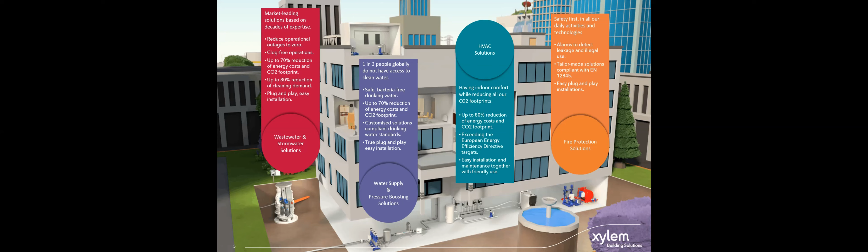And when we look on our overall building solutions from Xylem, from the top view, we are serving all the water cycles in a building. So we are having solutions for the water supply and pressure boosting when the water comes in. We are talking here about pumping solutions, metering, energy optimization. We will see this in some detail later on, because also the Reservoir Plus is part of these solutions in this application segment in a building. Then we have HVAC solutions. We have wastewater and stormwater solutions, and we have fire protection solutions. So we have really a very wide portfolio to help to make green buildings more green and more efficient.

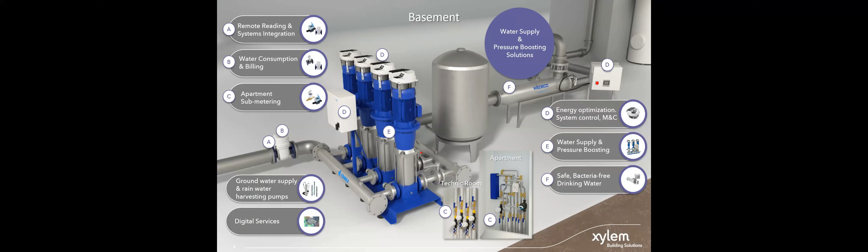So talking about water supply, this is a general overview here with the applications that we serve. So from the metering, when the water comes inside of a building, to a possible booster set in a commercial building with Hydrovar on the top, which is a frequency drive which can be mounted on any installed pump, electro pump, on a standard motor for energy optimization. We have UV treatment to ensure safe drinking water inside of the building, also combined with monitoring and control applications.

We do sub-metering in the apartment. We have digital devices and services to connect the systems to cloud-based services to monitor our systems 24 hours, 7 days a week, to ensure that everything is okay. And next to the surface solutions that you see here, we have also a wide range of groundwater supply and rainwater solutions.

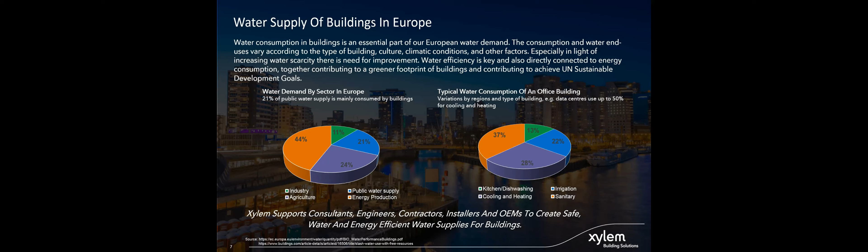And now we will jump into the application of water supply and pressure boosting. This is very specifically where we will find our new reservoir, and Liam will tell us now more about this new solution for water supply and pressure boosting inside of buildings.

And of course, we also need to integrate our house systems, like solar panels, air conditioning units, and water tanks, or rainwater harvesting, to simply make buildings more sustainable. And our purpose is simply to guarantee stable water pressure at any time of the demand that is needed, to ensure the lowest energy consumption, and to make it simple for our customers to install it, and to have an easy life when it is installed.

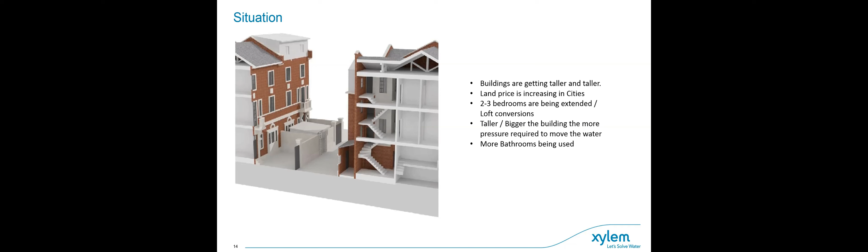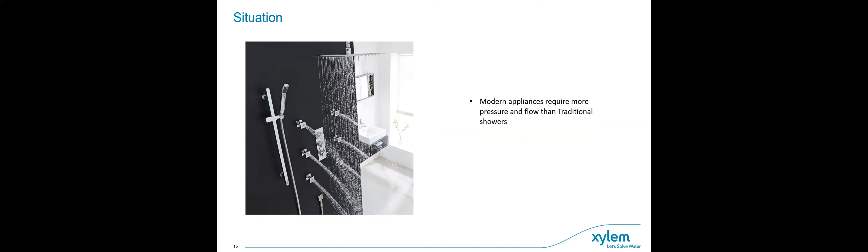And also with the extensions and pipework going into the loft, there's a natural demand for more pressure to overcome those losses in the pipework. At the same time, more modern, more luxury appliances require greater pressures and greater flow rates than what we would have seen 10, 15, 20 years ago. So there's generally a greater demand for more flow and more pressure in modern day houses.

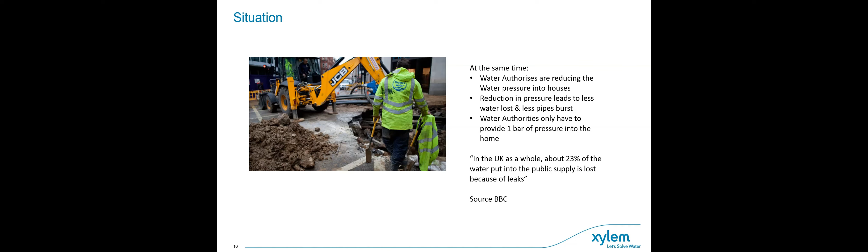Now, water authorities only have to provide 1 bar into a domestic dwelling. So as you can see, there's a bit of difference between houses requiring more flow and pressure, and at the same time, water authorities reducing the pressure going into buildings to overcome some of the losses in the system.

And then the UK is a little unique from mainland Europe, in that every time you want to boost the pressure on the main system exceeding a flow rate of 12 litres a minute, you have to have an air gap between the water level and the inlet of the mains. This is to prevent contamination into the mains. So in the UK, legislation has stated over the past 10, 15 years that before you can boost the water pressure into your house, it has to go into a break tank, with an air gap between the water level and the inlet of the mains.

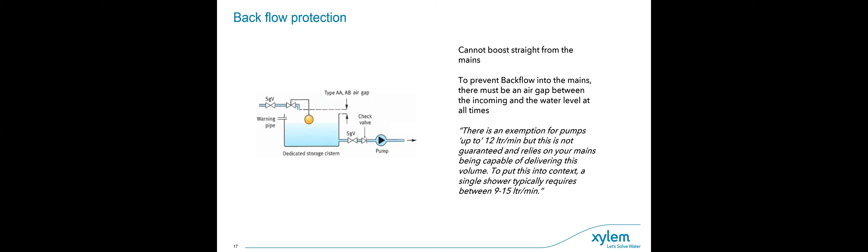So we've got 3 kind of issues then at play. We've got the water authorities reducing pressure going into domestic dwellings. You've got a general requirement for more pressure and more flow due to design of buildings and requirements of modern day applications. And you've also got a requirement from the water authorities to have an air gap between the level of the water and the main supply.

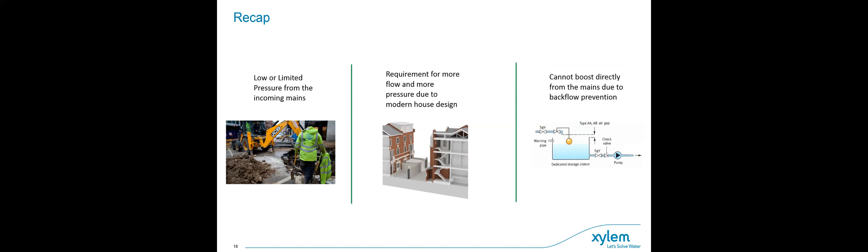So based on these problems, there is a requirement for a compact break tank booster set to boost the water for domestic and light commercial applications, which is the reason why we have launched, or will be launching at the end of the month, the Resvari Plus, the compact break tank booster set.

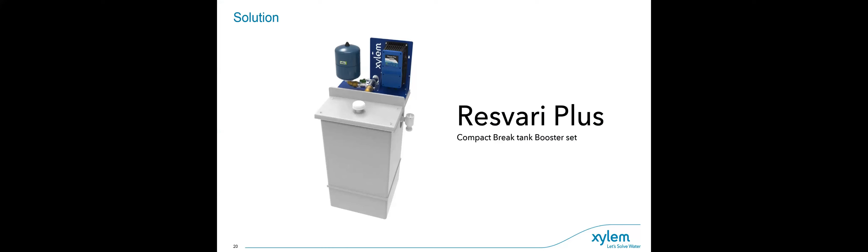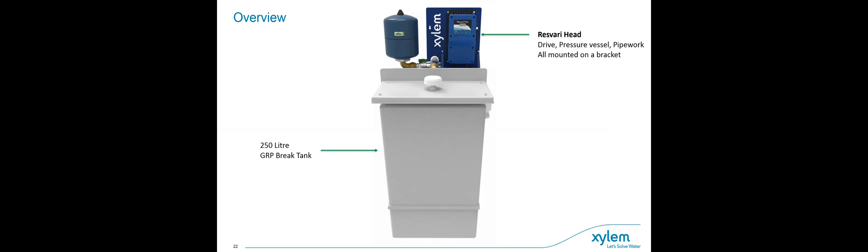So in this section, we're going to be talking about the design of the product. It generally comes in 2 parts, or we're referring to it in 2 parts. You've got the head, which is the drive, the pressure vessel, pipework, and that's all mounted on a mild steel bracket. And then you've got the GRP tank that the head sits on. And inside the tank, you're looking at a stainless steel submersible pump, and you've got your traditional float valve and float switch to protect the pump.

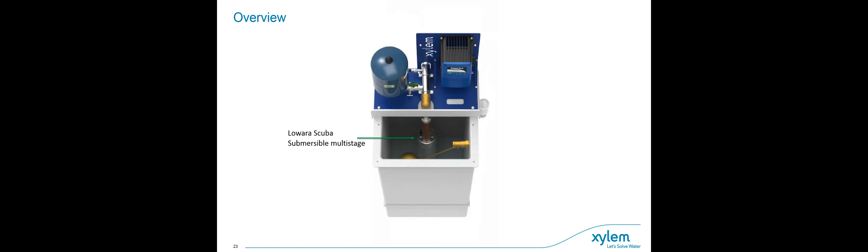And as you can see here, this is the view of the unit from inside. So if you were to remove the lid of the unit, you can see the scuba pump sitting right in the middle there. Then your ball cock to the right. And we've designed the unit, especially in terms of footprint, to sit quite nicely in a domestic installation. So it doesn't look out of place in your garage or an outhouse or a utility room.

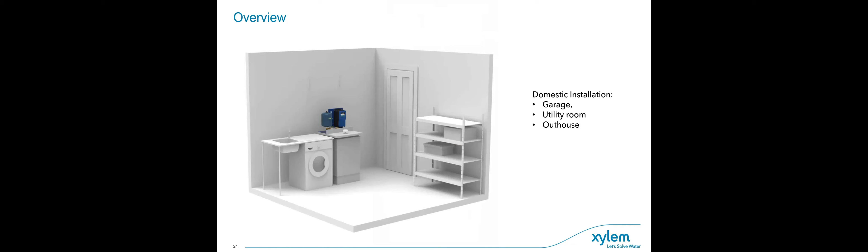And in terms of the footprint of the unit, it doesn't differ too much from a traditional washing machine or a tumble dryer. So you're looking at a washing machine or tumble dryer having a width of about 600 by 600 deep. And we follow that as well. So our unit is around about 600 deep and 700 wide. And this allows it to be maneuvered through a traditional domestic single doorway, the single doorway being round about 750 wide by 2 meters tall. So you're able to maneuver the Resvari Plus through a domestic doorway without any changes.

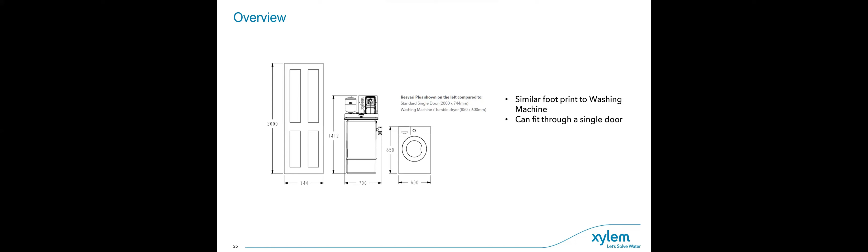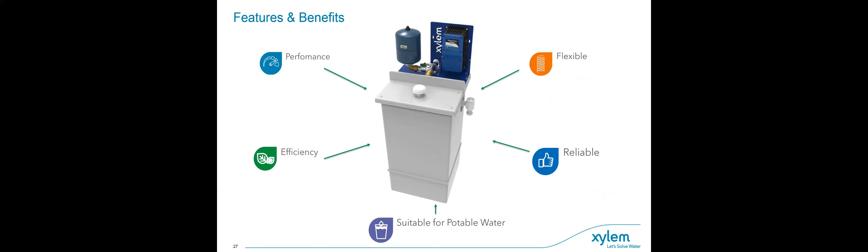So now we're going to be talking about the features and benefits of this new product. These are the topics in terms of the performance, the efficiency, the suitability for potable water, the flexibility of the product, and the reliability of the components. So in terms of performance, we're using 8 variants of scuba pump inside the Resvari Plus, and the flow rates range from around about 1 cube an hour all the way up to 7.

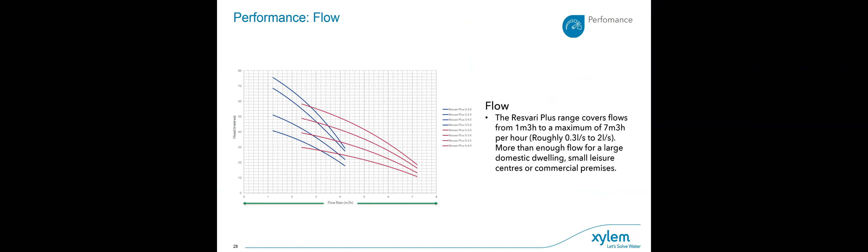And in terms of the pressure, we can see that one of the smallest scuba units, the 3-3, will do around about 2.5 bar at 3 cubes an hour, all the way up to the most powerful unit, which does round about 7.5 bar pressure, closed valve.

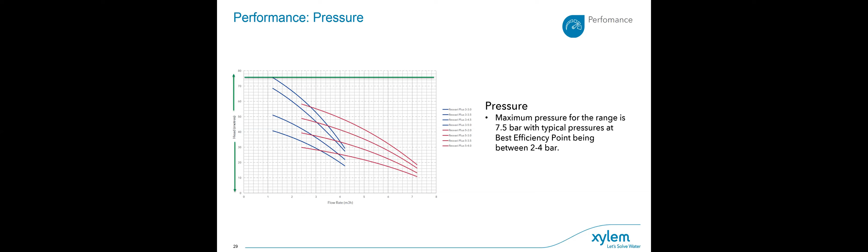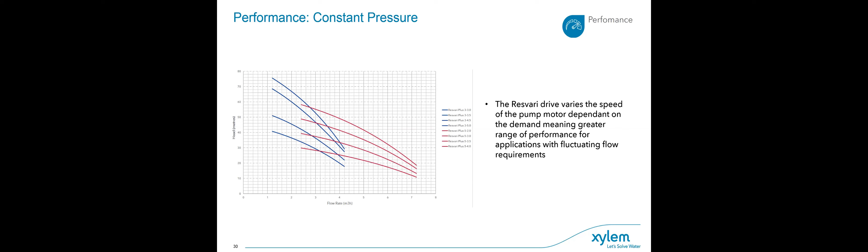And in terms of the performance as well, because the unit is built with a variable speed drive, you can set the variable speed drive to deliver a constant pressure. So in a traditional domestic application, depending on how many outlets you have open, depending on the flow rate, the pump will ramp up and slow down to maintain a constant pressure within that dwelling.

Next, we're going to move over to the efficiency of the product, and we're going to be talking about the variable speed drive. So this is the drive that we fit onto every Resvari Plus. And the general rule of thumb is variable speed drives can cut energy consumption up to 70%, and that's compared to a traditional fixed speed unit. Now, that is a general rule of thumb, and that's a rule that we've used in terms of talking about variable speed drives. So your mileage may vary depending on the application. So you can cut the energy consumption up to 70% versus a fixed speed unit.

And as I mentioned earlier, the drive modulates the speed of the pump depending on the flow requirement. So you've got one tap open, the pump will run slowly, all the way up to if the shower was on, if a bath was running, the pump will run flat out.

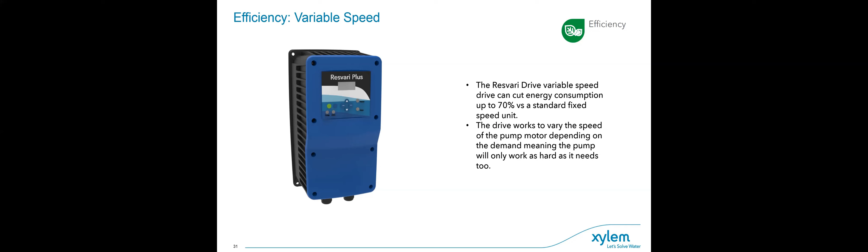The drive itself, it's very similar to what we purchased out of Italy, which is the Resi Boost. However, it's been slightly modified for the UK market. And it's perfect. It's absolutely perfect for domestic light commercial use. So it perhaps doesn't have the features you would find on an SMB set or a GHV set. It doesn't have BMS control, but for this type of application, it's absolutely perfect at maintaining a constant pressure.

We've also modified the parameters very slightly, so to prevent a user, a house owner, from accidentally changing some of the settings and rendering the unit useless. So we've hidden a lot of the important settings behind a commission menu. So that's just for a service engineer to modify on site. And like I said, this will prevent errors from happening and stopping the water supply.

And also with this unit here, we've allowed for two drives to speak to each other. And compared to an SMB or a GHV booster set, they act in the same way. So if one of the drives was to fail or one of the pumps was to fail, the second unit will take over and become the master unit.

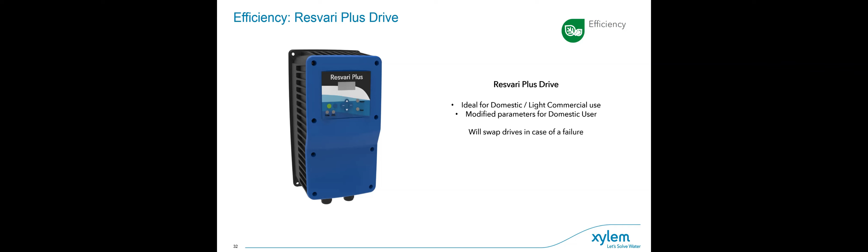In terms of efficiency as well, we'll talk about the scuba unit. So we are using the latest generation of scuba pump. It was already an efficient unit, but we've made improvements to improve the efficiency. And the latest generation is now one of, if not the most efficient 5-inch submersible multi-stage pump on the marketplace. And it's also fitted with an IE3 rated motor as well.

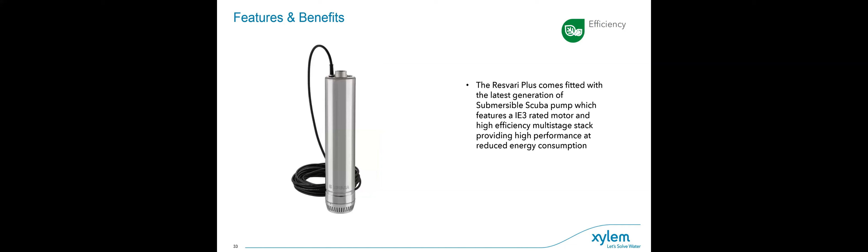Moving over to the flexibility of the product. As you can see on a slide I've shown you previously, it fits quite nicely into a utility room. So it's not too obstructive. It doesn't take up too much room at a domestic dwelling, but it's also perfect for crowded plant rooms and storeroom cupboards. So if you're looking at an application which is really limited on space, then you could look to use a Resvari Plus to provide that cold water boosting pressure.

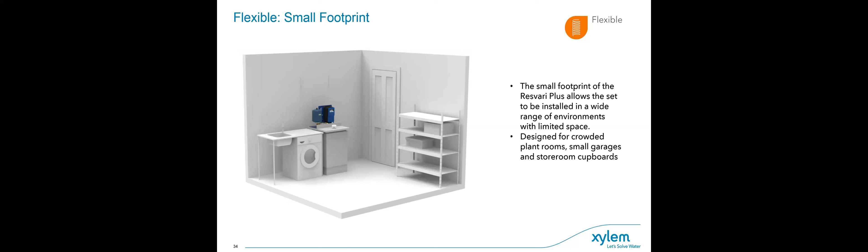Another thing that we've looked to integrate in terms of flexibility of the product is the back bracket can be removed. So in terms of the head of the unit, you've got two side brackets which hold the back bracket in place. So if there was ever a time where you wanted to install the Resvari Plus unit maybe outside, and you wanted to protect the drive from weather, you can detach the back bracket and fit it to a wall, an internal wall, or somewhere you can access a little bit more easily than when it's mounted to the top of the unit.

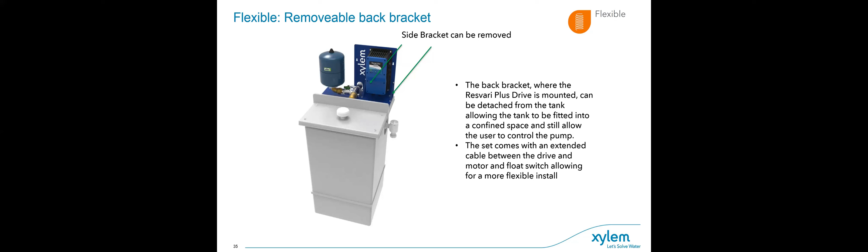It also gives the user a little bit of flexibility, so they can remove the back bracket, put all the pipework in place behind the unit, and then reattach it. So if there's ever a leak on some of the pipework or a leaky valve, for example, the installer can remove the back bracket, access the pipework, and then replace it.

And what we're supplying along with the Resvari Plus unit is an assist tank. So we started supplying these units on the original Resvari that was released 10 years ago, and we're looking to carry over that idea. So if you wanted to extend the stored water capacity to 500 litres, you'd be able to purchase another 250 litre tank, and then you could couple the two together using just a bit of pipework. We recommend a 1.25 inch or an inch and a half connection at the bottom of the tank.

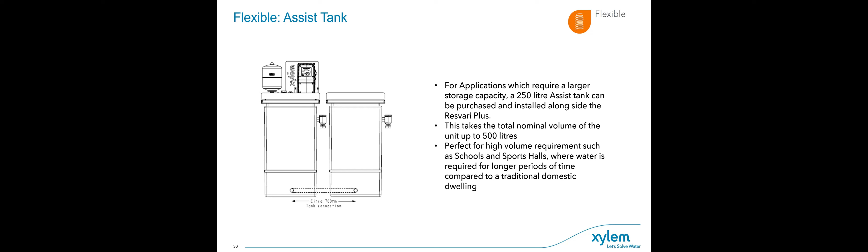Talking about one of the main aspects of the design of the product, we've designed it so that the Resvari head, the item with the bracket, the drive, the pipework, is actually one single part number. So regardless of the pump that you choose to use in your Resvari Plus, there's only one part number that we use down in Axminster. Now this gives us the benefit as we can stock the head in Axminster, and that can significantly reduce the amount of time it takes to build up a unit.

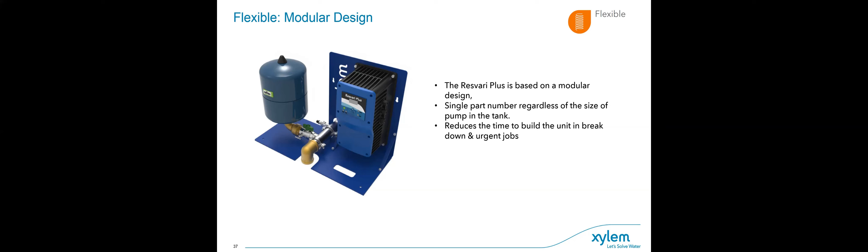So rather than building up a unit from scratch and it taking an hour and a half, what we're able to do in Axminster is fit a Resvari head off the shelf onto a tank, and it can go out the same day. So for applications where you're desperate for one of these units on a same day dispatch, we have that option available. But also what it allows us to do is sell the head by itself.

So if you're an installer and there's already a tank on site and you want to keep that tank, let's say it's a 500 or a 750 litre tank that's in good condition, you're able to buy the head off us as a separate item, bolt it to the top of the tank, and then buy a Scuba unit off us separately. So you're able to almost take an existing unit, a fixed speed unit, and turn it variable speed with just having to buy the drive from us, the head off us and a Scuba pump. So looking to take advantage of what we've done with the Hydrovar many years ago in converting fixed speed systems into variable speed.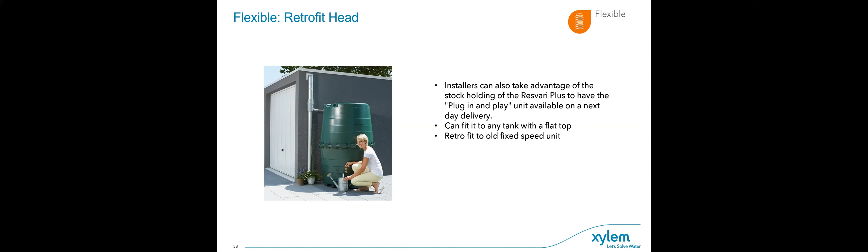And as I mentioned previously, when talking about the drive, it also allows us to have two units linked together. So you can essentially have a twin pump system with a capacity of 500 litres by purchasing two units and then linking the two together. And all it is is just a typical cable that links the two drives together.

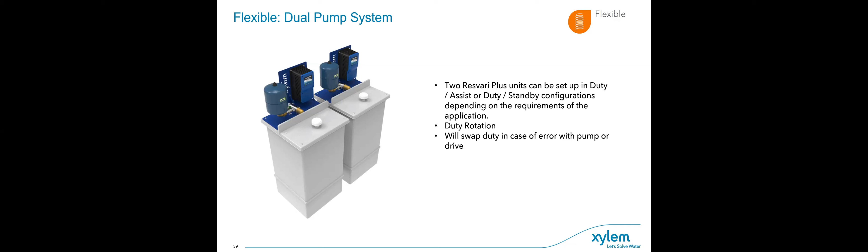And as I mentioned earlier, it's got the standard features you would find in a variable speed drive. So duty rotation, so it swaps duty to maintain equal wear over both pumps. And also, as you find with a boosting application, which is duty assist or duty standby, a second pump will come in when the first one was to fail or encounter an error, or the second unit will come in where the first unit isn't able to keep up with the demand. So you've got a couple of options there in terms of the flexibility of the unit.

Now we've got to move over to the materials that we use for this product, so the suitability for potable water. So we wanted to move away from any plastic materials in terms of the pipework. So all of the materials that we use on the unit are stainless steel, brass or copper, so all premium materials. We're using no ferrous parts at all. So it is suitable for a typical potable water application.

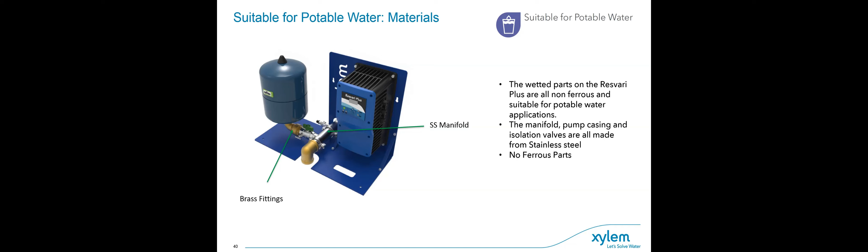And what we were quite keen to do is standardize on the highest level of backflow prevention, which is suitable for category 5 applications, and our units come with an AB air gap. So as I mentioned earlier, what we require in the UK for any kind of boosting application where you're taking from the mains is an air gap between the top layer of the water up to the inlet of the unit, so there's no cross-contamination.

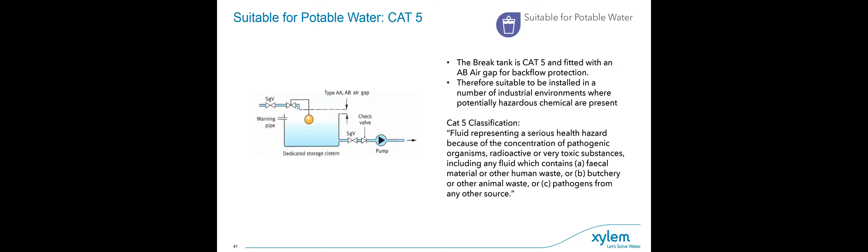Now, category 5 allows us to install these units in serious health hazard environments where there's a concentration of pathogenic organisms, radioactive or very toxic substances. So you'll be able to install these units in applications such as abattoirs or recycling centres where there are hazardous chemicals around.

So in terms of the category 5 unit, we have the overflow, which is fitted on the right hand side, and we also have the weir installed on the left. So in the case of a rare failure where the tank keeps on filling, let's say the float valve is stuck against the side of the tank and keeps on filling the unit, the water will then initially come out of the overflow.

But if there is ever an issue with the overflow, let's say the strainer basket is full and it blocks the access, you're also able to rely on the weir, which is on the left-hand side. So that maintains a constant air gap between the water level and the inlet, so there's never any chance of cross-contamination going back into the main supply.

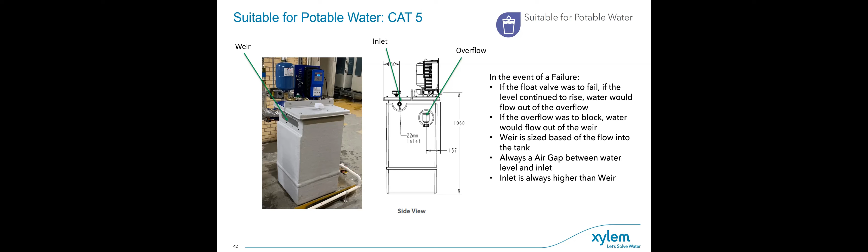We're talking about the reliability of the product now. So the pump that we use is the Scuba, as I've mentioned, and this is generally known as a robust product with a stainless steel casing. And we also use technopolymer impellers, which for an agriculture application where there's sand in the water, generally tend to last a little bit longer than stainless steel impellers. But that's not applicable to this application because the water that you'll be pumping will be cold, clean water from the mains.

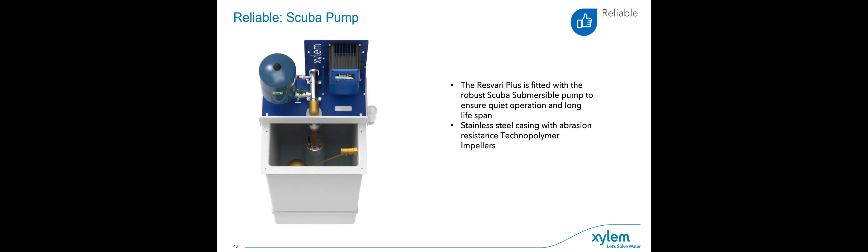And also to protect the pump from dry running, we use a traditional float switch, typical to what you find on our other break tank boost set products. And this will protect the pump from dry running, let's say if the pump flow was to outstrip the incoming supply.

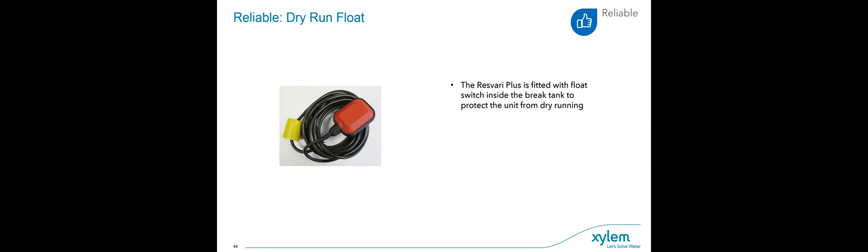And then as well as the physical dry run protection with the float switch, we also have the electronic offering as well. So with the drive, if the drive senses that the pump can't hit pressure 4 or 5 times over a set period of time, then it will cut the pump off. So you've got your secondary dry run protection as well. You've also got electronic protection preventing overload of the pump motor, overvoltage and undervoltage as well.

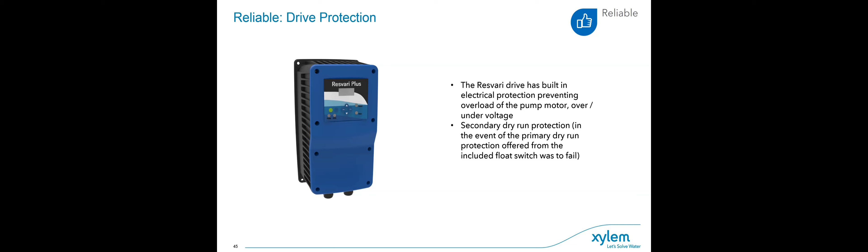So, as I mentioned a little bit earlier, we're quite keen to hold stock of this product down at Axminster. So we're stocking 250 litre tanks in Axminster. We're stocking at least 2 to 3 heads down in Axminster as well. So we're able to turn around a complete unit in a day, in a decent amount of time. So you'll be able to get your product on the next day service.

And we're also looking to stock probably what we think is the most popular product that we're looking for, the Resvari Plus 250 5-4. So it's the top of the range, top of the performance unit. So we'll be stocking that in Axminster as well. So even if you did have an urgent application that requires a unit on a next day service, we're able to cater for that down in Axminster.

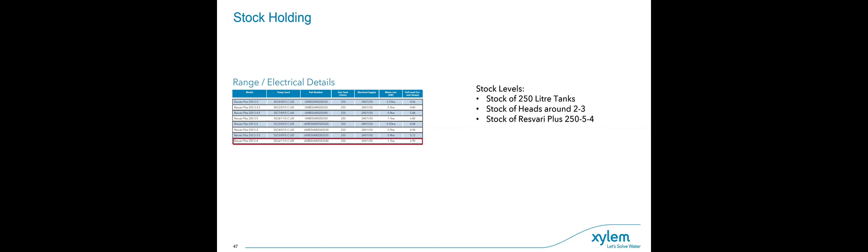The Resvari Plus will be entered onto Xylect later on this month. So fingers crossed, all being well, the product will be available for selection in August. So you'll be able to select the Resvari Plus as you would do any other Lowara product or any other Flygt product by logging onto Xylect, putting in your duty, and then selecting the Resvari Plus range to select from.

And on the Xylect website, you'll be able to download product documentation, spec sheets specific to this product. You'll also be able to download step drawings, DXF files as well.

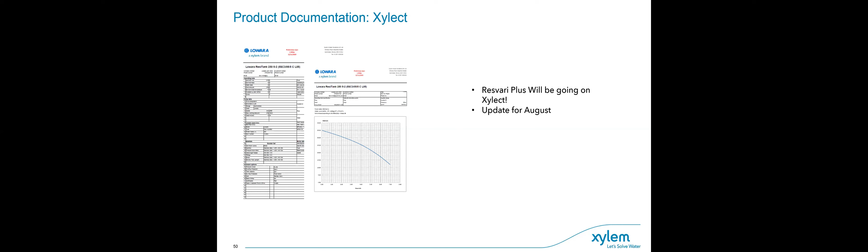Product documentation in terms of the exploded spare parts diagrams, they will be available on Spark as well. So if you've ever used Lowara Spark, which is the website for exploded parts diagrams, you'll be able to search for the Resvari Plus as you would do any other product as well. So that will be available at the time of launch.

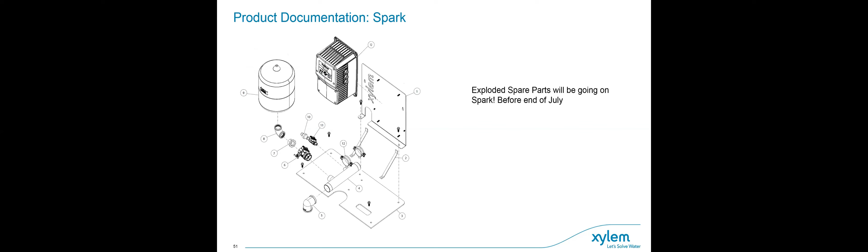And we're also looking to have the BIM models available as well in the coming weeks. So the step files and the DXF files for the models are available down in Axminster. But as I mentioned, they'll be transferred over to Xylect later on this month for availability in August. But we are also looking to include BIM files for consultants as well.

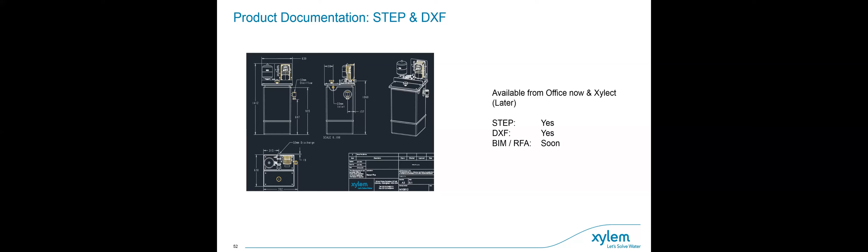So that's myself finished there. I just wanted to hand over to Karl then, just to finish off the presentation.

Yeah, before we go to our Q&A session, we quickly want also to remember that we're not only supporting to create more sustainable buildings with our solutions, we also create social value with our watermark activities. We have partners around the world, and especially when you look now to the news with the disasters in Germany and in Central Europe with the thunderstorms in the last week, we are now already helping there with associations to help the people who are impacted, but not only here, of course, also in countries where it's not, I would say, a daily business that you open the tap and you can get clean water out of that.

We're also helping in Cambodia, in countries, to get schools supplied with fresh water. So we have there a lot of partnerships, also in UK with Cityzens Giving from Manchester City. So yeah, just to add this.

Yeah, and now we can come to our Q&A session. And Liam, I have seen there were some questions from Richard and from Steve in the chat, and there are two related to regulations. One is from Steve and one is from Richard. So is the unit DWI compliant for the UK market, and is it WRAS approved, or will it be in the future? Yes, the answer to both of them is yes, it will be in the future.